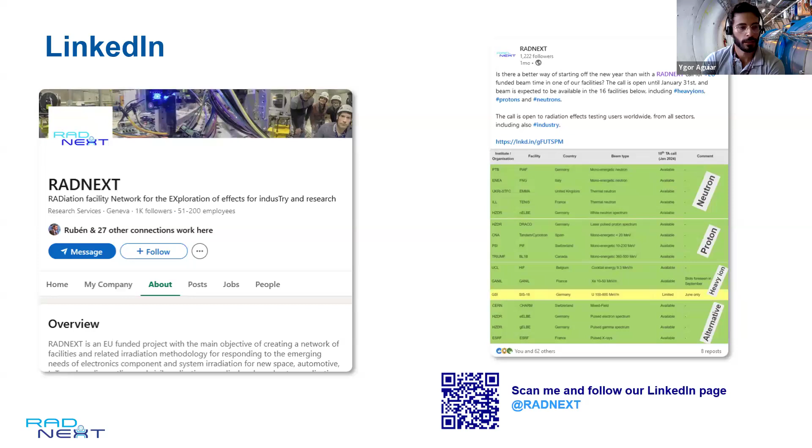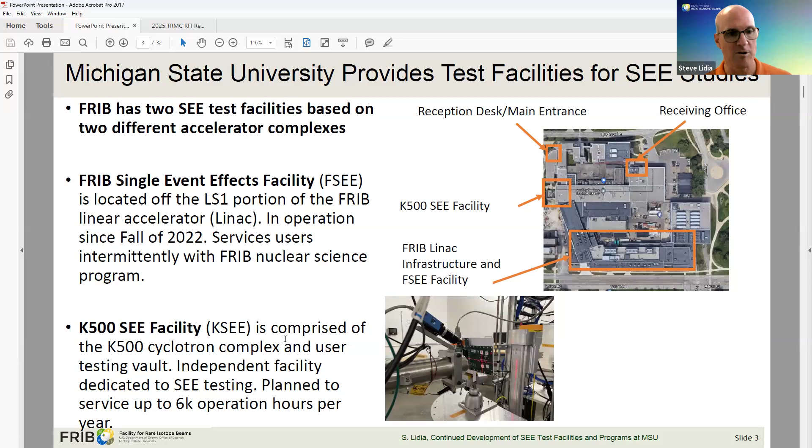The cyclotron portion is over here, and this is using our pre-existing K500 cyclotron, which had been one of the drivers for our nuclear physics program for a few decades. When the linac came online, this one no longer had a role to play, and so we repurposed it. We've developed now a standalone and dedicated facility based on this K500 cyclotron, and we call that KSEE for the K500. So there are two facilities.

Historically, I'm going to run through a little bit of history now with the cyclotron-based facility. It had begun as a standalone nuclear physics driver in the 1980s. There was a second accelerator, or sorry, cyclotron, the K1200, which was also being used around the year 2000 or so.

Those were coupled, so the K500 became an injector to the K1200. And then that drove our nuclear physics program from basically 2001 until 2021, when we cut the umbilical to the experimental beamline—shown here on the lower right—and connected it to the linear accelerator. But that saw beam powers up to about 10 kilowatts, and it also gave us some initial work on single event effects testing with heavy ions.

In one of these experimental vaults, we had basically a cart with instrumentation that we could put in place to run some experiments. NASA worked with us early on, and we conducted just a handful of sessions with them. But it wasn't the most convenient facility to use, and it wasn't the most cost effective either, so we saw limited use with these platforms. But with the advent of the linear accelerator, and now with the dedicated K500 facility, we can optimize towards running with single event effects experimenters.

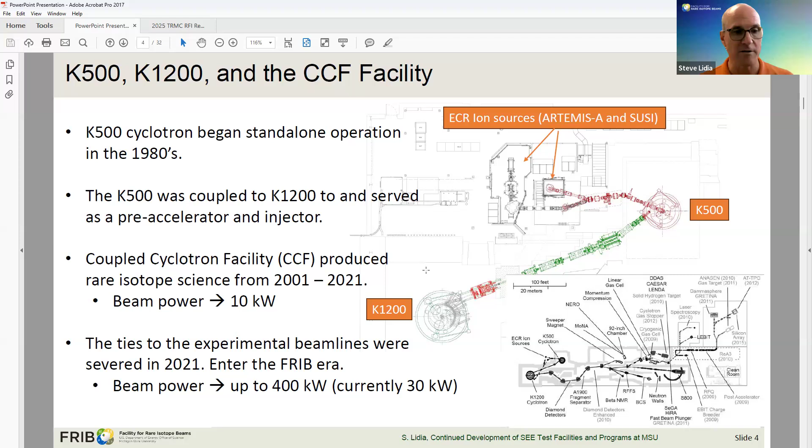In terms of that transition, we had to do a few things. We had to recommission the cyclotron, which involved moving from a second harmonic operation back to a first harmonic operation. We had a legacy control system that we've kept and started to modernize and incorporate into our more modern EPICS-based system. We had to create a new personnel protection system, plus all new extraction beam lines, delivery beam lines, and user vaults. That continued through early 2025, just a little over a year ago.

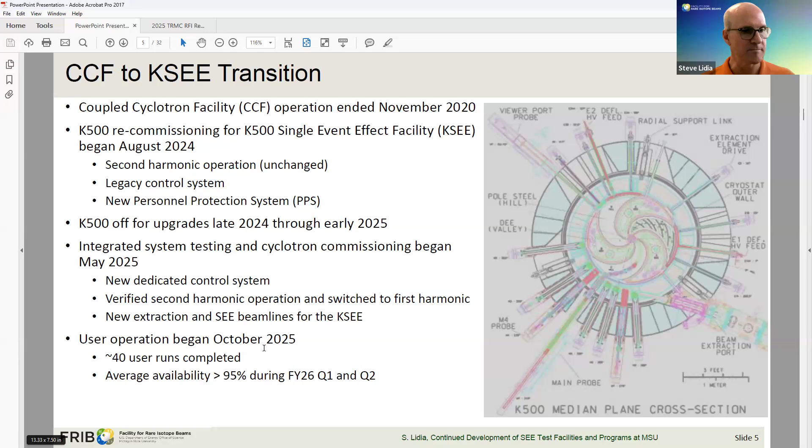Integrated system testing was going on last year at this time, where we brought the cyclotron and extraction systems up, and then into user operations as a platform in October of this last year. We've completed more than 40 user runs at this point, and our availability is fairly high.

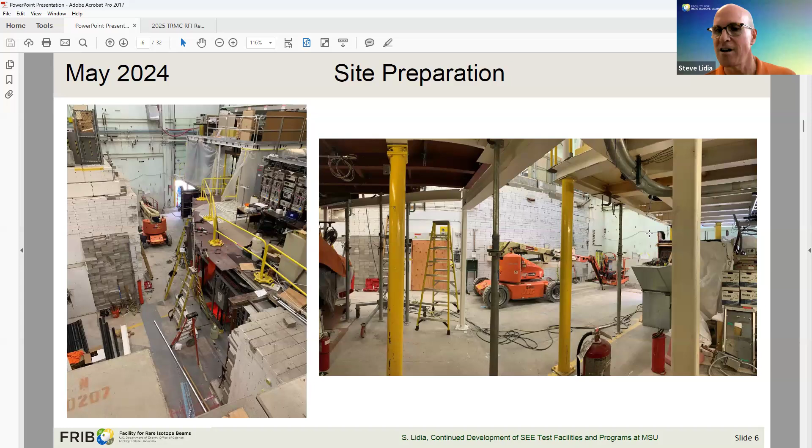This is showing, two years ago, the beginning of our site preparation. Underneath the mezzanine you can see here. By December of 2024, we had the beam lines basically installed.

We have a straight ahead beamline and Faraday cup that we can use for diagnostics and tuning operations. A new wall plug and beam stop was installed, so now this allows us to stop the beam in the cyclotron vault while access in the user testing vault is enabled.

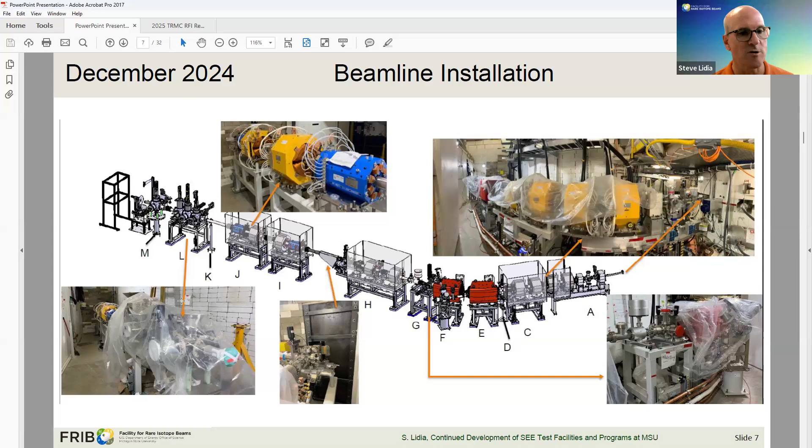We're seeing the beamline established into the downstream section. In August of last year, we were starting the commissioning, so this is showing the downstream beamline section. The octopole and quadrupole transformer is here at the farthest upstream area, and then we get into the dosimetry section, and then the user test section.

That user platform is shown over here on the right, showing the 2-inch window, so we can produce beam spot sizes up to about 40 by 40 square millimeters, a mounting plate, rotational platter, etc., to allow for target mounting and targetry.

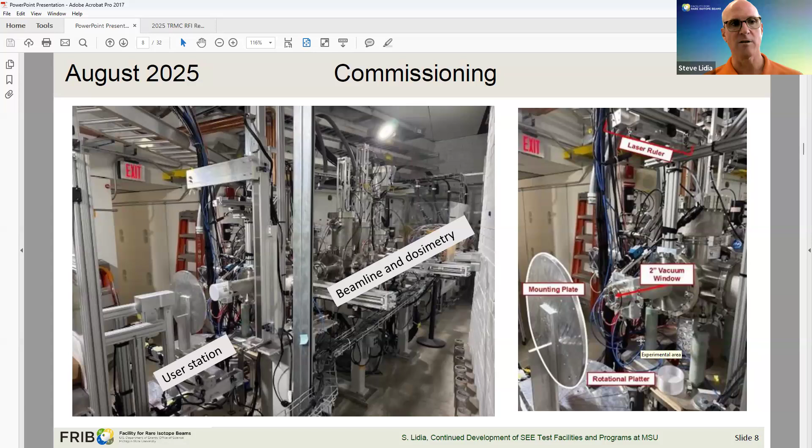So we've now been operating since September. Our first users appeared in October, and the new facility is now up and running. I'll talk a little bit about the capabilities now.

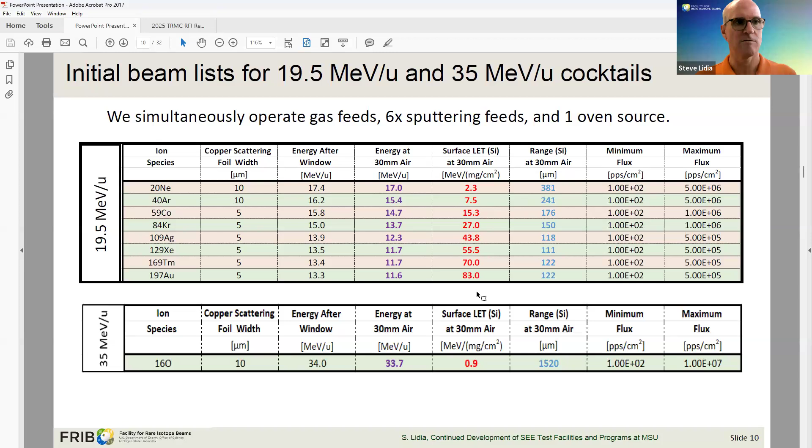One of the improvements we needed to do to facilitate fast tuning of the ion species for test purposes was making some updates to the ECR ion source. This is an existing source, a room temperature source. We actually operate two of these, Artemis A and Artemis B. Artemis stands for Advanced Room Temperature ECR.

Artemis is an ECR ion source, but it's a 14.5 gigahertz source, compared to our high performance source, which is at 28 gigahertz and is a superconducting source. It's based on a very similar source at LBL—in fact, most of our ion sources are developed in close collaboration with Berkeley Lab. This one has been in operation since 2001 as an injector into the K500.

We have a second one, Artemis B, which is our room temperature source, and another source we use to feed the linac, the superconducting linac. So we have some experience now with two of these sources in constant operation. The nice thing about this room temperature source, at this relatively low frequency of 14 gigahertz versus 28 or 30 that high performance sources are getting to these days, is the volume and the access to the external part of the ECR ion plasma chamber.

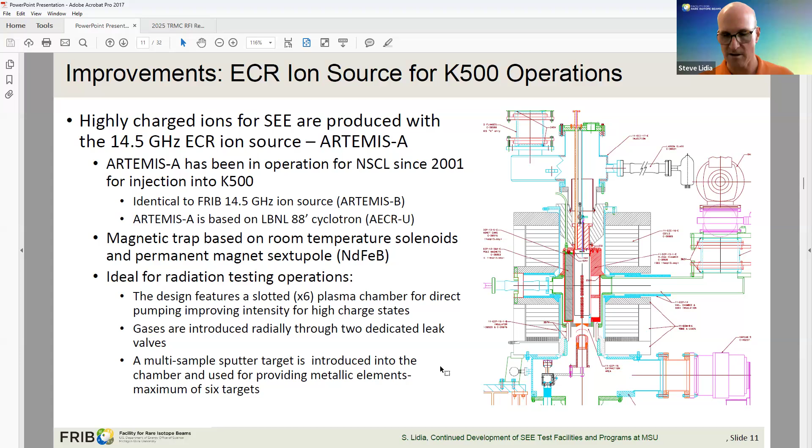We operate them by putting a bias voltage onto those, so we can bias these independently. When we bias it, we subtly change the plasma surface and allow plasma ions to impact on those foils or coupons. That acts as a sputtering source, introducing those elements into the plasma for extraction. When we turn the bias off, it reshifts the plasma surface and those are no longer contributing—so we can turn on and off those sources as soon as the plasma has been established.

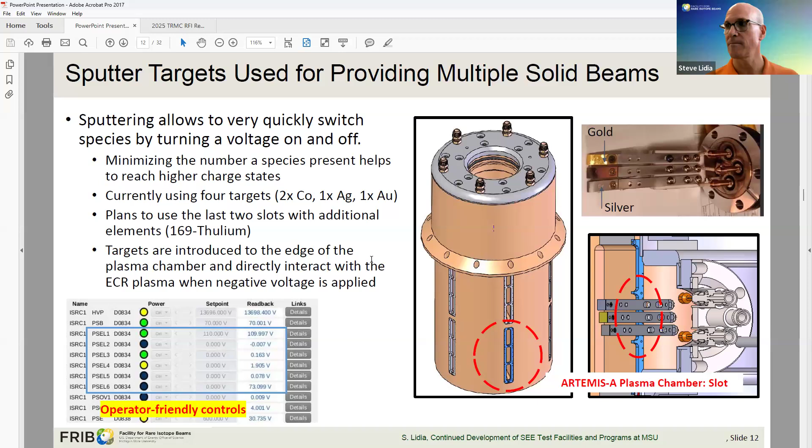Now, in terms of these cocktails, the nice thing about operating an ECR ion source and a cyclotron is we can pack in a lot of contaminants—I'll say contaminants because that's what these elements end up being, contaminants to an overall oxygen plasma. We can introduce them relatively easily and simply, in quantity—a large number of them, as long as they don't have overlapping charge to mass ratios. So we have to be specific about which charge state and mass state we use.

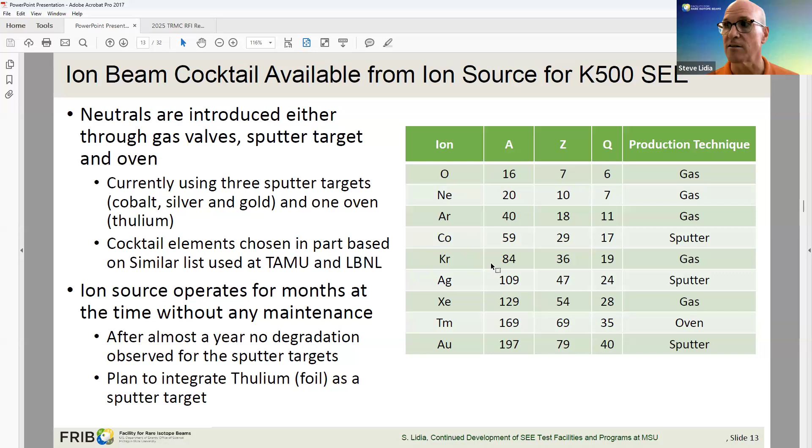But we can operate our sources and generate a large variety of ions covering a large LET range, since the mass varies from oxygen at 16 up to gold close to 200. The cyclotron then acts as an incredible charge-to-mass filter—by making small changes in the magnetic field at a given RF frequency, you slightly adjust the resonance condition to permit one or another of these elements to exit the cyclotron. In tandem, we can make those changes relatively quickly, allowing us to switch from one species to the next within about 10 minutes—a huge gain in efficiency for our users.

But to do that, we do have to set up our cocktails as we call them. So this is an example here of, let's say, our 19.5 MeV cocktail. That's the one that we've developed originally and that we're currently operating with. Our pilot beam basically forms the base of our charge to mass ratio for extraction, about 0.2.

We tune that, so that's our tuning beam. Our pilot beam is our tuning beam. And then as we change the main field by, in this case, plus or minus less than 1%, so this is plus 0.8% and minus 0.95%, it extracts those elements preferentially, and the other ones are still lost inside the cyclotron. We did add neon to our base list in December to add an additional light element.

And we're currently developing now our next cocktail, a 25 MeV per U, slightly higher energy, but it allows some deeper penetration into devices. This one will use a 40 argon 11 plus as our pilot beam, and then allow us to switch between these other elements. We'll need to develop perhaps some different gas feeds, but we're definitely going to be developing different ion charge states coming out. We started that development in March.

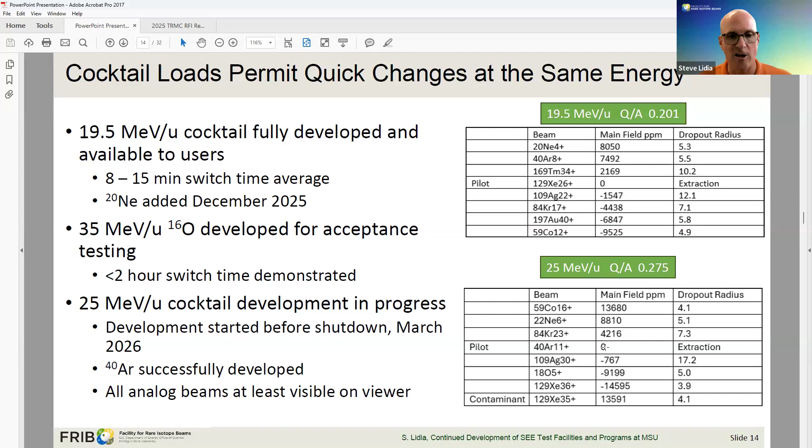We intend to have that completed this summer and be able to offer it sometime in the fall.

Other improvements that we have since made on our ECR source, again on the ion source side of things, is adding a second RF frequency. Now, this one we tested on the Artemis B ion source, which drives the linac, but it's a similar type of development, and would just need to string some additional waveguides to permit it to use on Artemis A. But the intention here is to add up to about 400 watts, somewhere between 11 to 13 or 8 to 12 or so. It's typically about 10 gigahertz that we need for a second RF frequency.

And that does some interesting things with the plasma surface, basically creating a larger area that's in resonance, from which we can extract ions, and creates some higher fields there so that we can drive heavier elements and to higher charge states for extraction. So we did some experiments with that on the linac.

So here's an example of the installation on the linac. This was a solid state power supply, solid state amplifier, that we purchased commercially, and then this was installed earlier this year. We added additional waveguides to the back of the ion source, which was already primed for its use, so we just had to reconnect some other existing waveguides and string things a little bit differently. But this has been installed now and then tested.

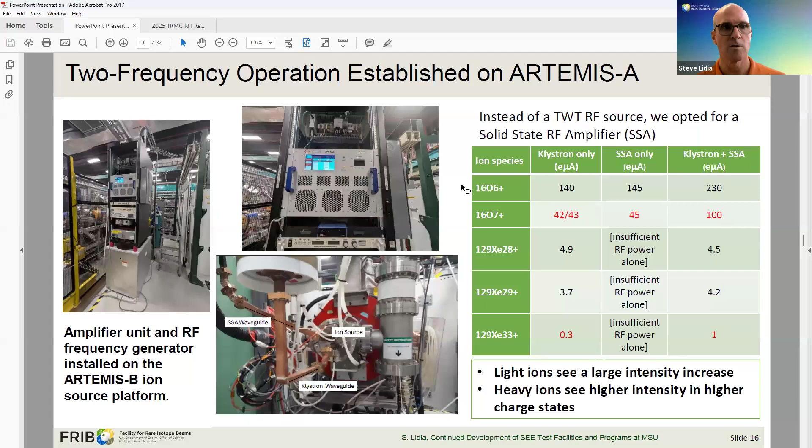I think even since this slide was developed a few weeks ago, we've since filled in June and July. So we still have time in the year, and we can schedule folks much farther out. But we're just working with the existing community and trying to make sure we can fit them in when they need it.

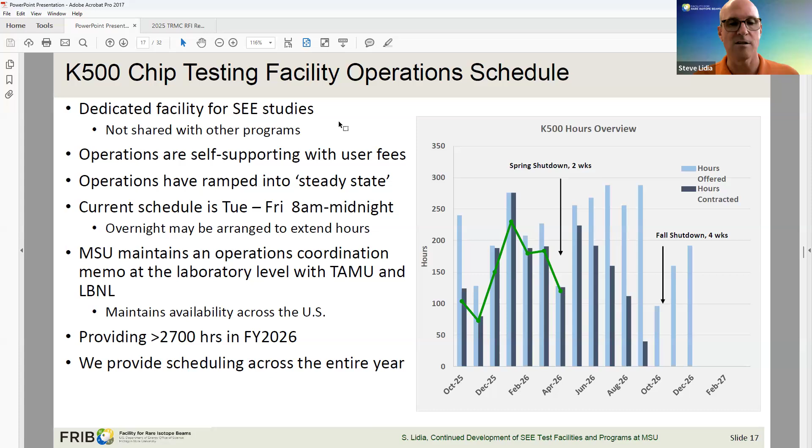We're on track to providing over 2,700 hours in our first year of operation through fiscal year 26, which runs October to October. As I mentioned, we're scheduled through the entire year. The other thing I should mention is that it's a dedicated facility — we're not sharing it with a nuclear physics program or a high energy physics program. This one is set up specifically for SEE users, and other folks that might be able to use the beamline with these ions and energies.

Getting into additional improvements, this is showing a photograph of our user control room, which is sited right next to the user vault, so it's really convenient for users to get back and forth.

You'll notice this touch screen panel in both pictures, and that's the main interface users have to the experiment, shown here on the larger image on the left, where users can manipulate the stage using 4 degrees of freedom: up, down, left, right, in, out, and rotation. We have targeting laser controls, both to calibrate the air gap as well as to identify the beamline center. Positions with the stage motors can be saved into presets and then recalled.

A typical user, who might be loading 8 or 10 or 4 devices to test in one session, can load them up out here in the user vault, use that touch screen to enable the presets and then define them. Then once they're back in the control room and ready for the run and data acquisition, they can just use the touch screen to move to those positions.

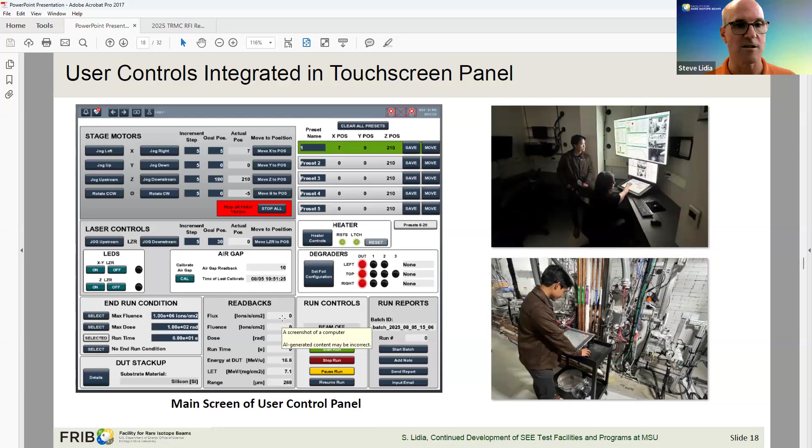Here's the live readback that the users would be seeing on a large screen above that touchscreen panel. There's the live flux and fluence shown here in this middle graph. There is basically just a reference diagram given the ion species and its energy, and whether any degrading systems are in, and what the air gap might be. And if the users have opted to incorporate a stack up, a list of materials and thicknesses in their device, then this dosimetry system can calculate what the LET versus range curve might look like as well. The species information is shown here, as well as the degrader information.

Now, I didn't mention it, but the users have access to basically pneumatically controlled degraders. These are foils which are inserted in the vacuum part of the beam line upstream of the exit window. And that covers a very wide range of attenuation of energy. And it's incorporated within our control system into the dosimetry.

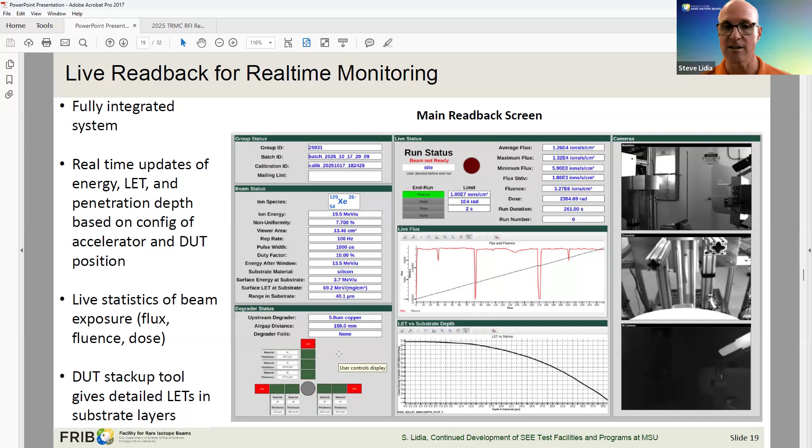This is on the right a picture from that user touchscreen panel, where a second window would come up, giving a list of the available degrading foils that are used. The ones in dark blue are the range of energy degraders which still permit the beam to have some finite energy at the surface of the device. If they're grayed out like this, that means the beam has lost all energy before it hits the device. So all a user needs to do is hit the apply button, and it inserts one or more foils from three different drives into the beam line, acting as an energy attenuator.

The energies and the LET at the surface, and the range computed at the surface in silicon, are shown here. That gives the users some information on what they might be using.

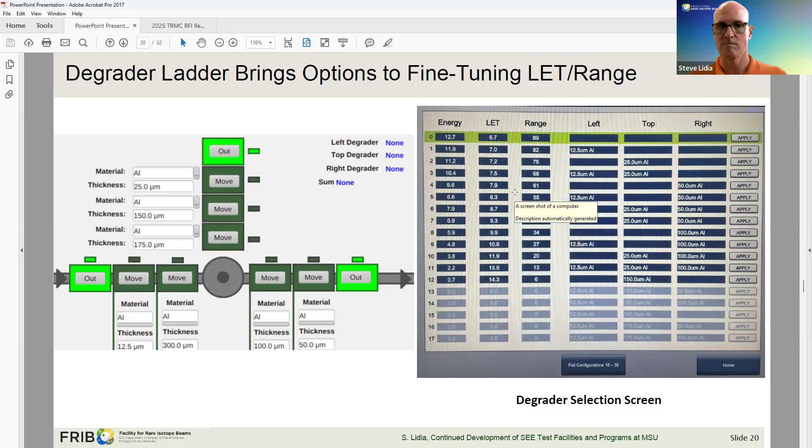The dosimetry we use: again, the triple degrader ladders are at the most upstream part of this three-cross system. We have a four-jaw collimator, which does the final beam shaping before delivery. But those collimation blades are isolated and instrumented, and we use that in a calibrated sense as a means of doing the live monitoring of the flux, which was shown on the last screen.

We calibrate those four jaws against a scintillator and PMT for rate, as well as a view screen for the beam size that allows us to calibrate the flux. A silicon pin stack is also used to verify the beam energy and the beam species, and to verify that there are no contaminants being delivered to the user, through the window and the DUT here.

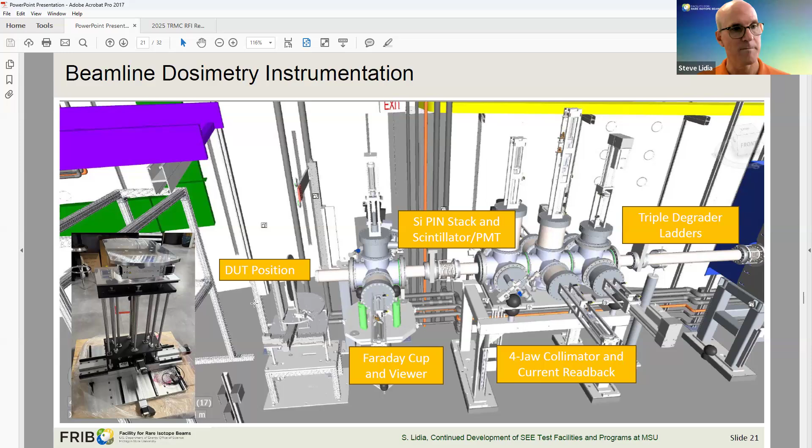So in terms of what that looks like, again it's the scintillator - it's just a plastic, I think it's a BC 404 or 408. Basic plastic scintillator, Hamamatsu PMT. That's basically our counting device, and it's sensitive over a relatively wide range of fluxes that we can produce.

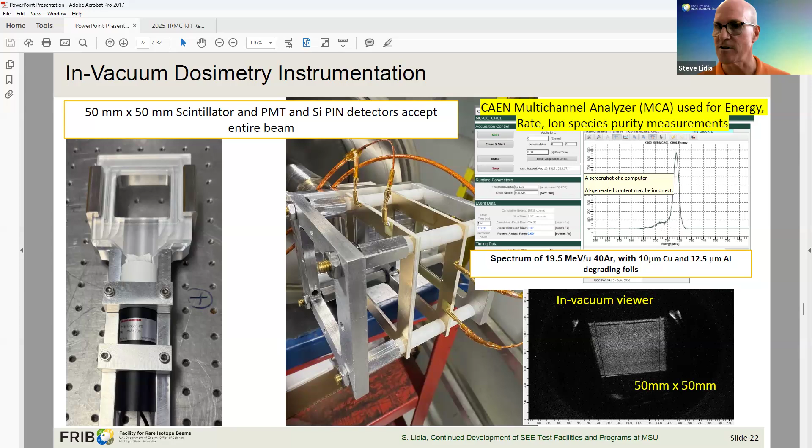The stack of our silicon pin detectors is shown here. And then we use a multi-channel analyzer for energy rate and ion species purity measurements. It's a nice system - it has, I believe, 8 channels. And that is incorporated into our EPICS control system, so it's an online measurement available to our SEE operators or the cyclotron operators.

For the users, we've now added an application. This is a web-based application. We're not actually announcing this until the NSREC conference in July, where we have a paper for it, and at that point it should be online and live for users. But this is just a preview. Eventually they'll be able to use it from anywhere, since it's just a web-based application.

We'll have our list of ion species that are available. We have some facility presets for species, energies, and degraders at both the KSEE and the FSEE facilities. So the ions are indicated, and degraders can be applied, either aluminum or tantalum, on the FSEE side of things.

Then the users can create a stack, if they're looking at our full beam line. We operate a copper foil, 10 microns, which acts as an emittance spoiler and allows us to homogenize the transverse profile of the beam, but it also interacts with the beam as an energy degradation element. Our vacuum window is polyethylene naphthalate, PEN material, about 100 microns thick, and then there may be some air drift. So a stack-up can be produced.

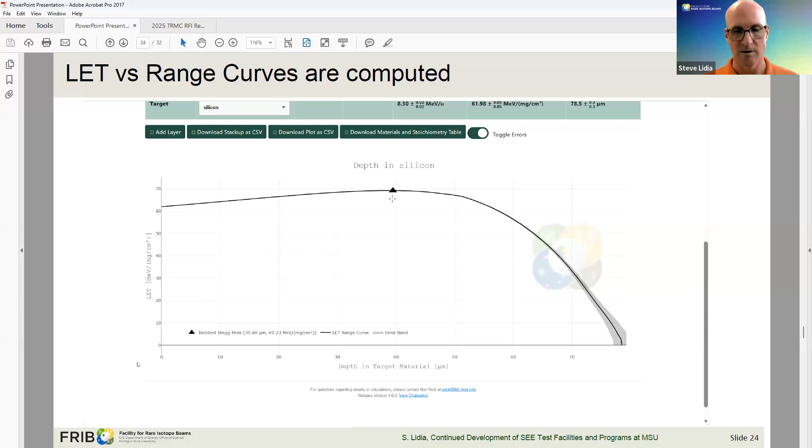We operate up to, again with both of these two facilities, energies of about 40 MeV per nucleon. In the course of developing the linac, typically for the nuclear physics application, we operate a third of it for now for SEE operations, so whatever we do with the linac for nuclear physics has some application for us.

One thing we've had to develop, very useful for SEE applications, is a machine learning based algorithm for quickly rephasing the full complement of linear accelerator cavities. This is how we change the energy of the beam. The full FRIB linac has about 308 SRF cavities, superconducting radio frequency cavities, and using these tools we can rephase them in about 180 seconds, about 3 minutes. That used to take us about 3 days when we first did this, with manual scans. But we've got it down now to a good model and a set of measurements for calibration, confirmation, and validation, so we can change that relatively quickly.

That's important on the linac-based facility, where if we're changing energy we basically need to change the tune depending on the charge and mass of all of those ions - which operates in a different type of production than our cyclotron-based system does. We have other models that also affect our trajectory, taking transverse information from our beam position monitors to allow us to steer and keep the beam centered. This is one area we've been working on for the last few years.

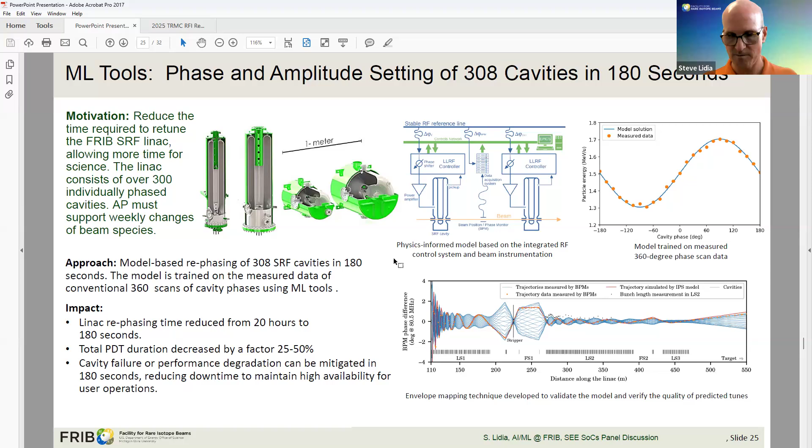There's another set of tools - this is a very busy slide - we have a very active artificial intelligence and machine learning set of activities within the Accelerator Physics group, which looks at tuning of multi-charge state beams and optimization of tunes through the linac. But what I wanted to mention here is one application we've generated: optimizing the output from these ECR ion sources, these plasma-based ion sources.

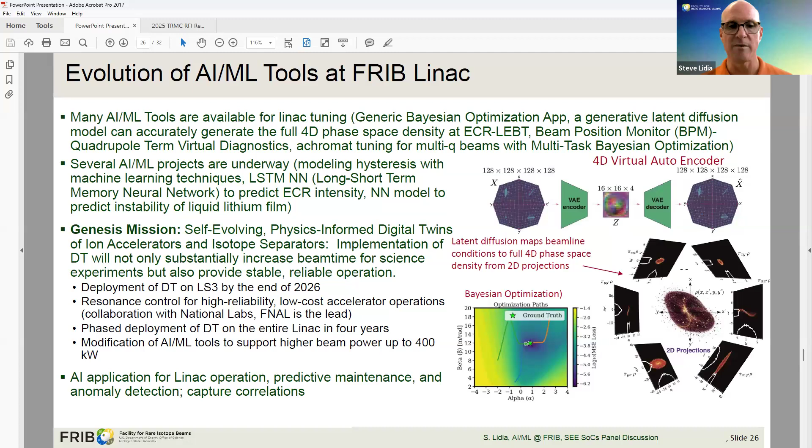Using projections, 2D projections with wire scanning data or other types of diagnostics, we can reconstruct the 4D distribution of the ion beams as they exit the ECR ion source, which allows us to maintain or improve the beam quality for our eventual users. This is something we can incorporate both on the linac side as well as the cyclotron side for all of these types of ion sources, and it's allowing us to improve the emittance and increase the brightness of these sources by several factors.

Additional developments on the user sample holding and processing side: we're exploring computer vision work to do a couple of things. One is to generate a beam profile view, allowing us to use computer vision models in real time to estimate and demonstrate to users what the beam profile will be. When we're about to irradiate their samples, it's good that they know the beam size so they can compare for overlap, or change the spot size by changing the slit size. It provides a projected view onto their device so they can make sure everything is lined up accordingly.

We've also developed a searching and labeling profile which looks at specific devices and can assess and index them accordingly. This allows us to think about automatic targeting, targetry, and exposure systems, where we can analyze a board like this. A user could indicate they want to expose this device, this device, this device, and we adjust the positioning stage accordingly, providing automated scanning and exposure routines.

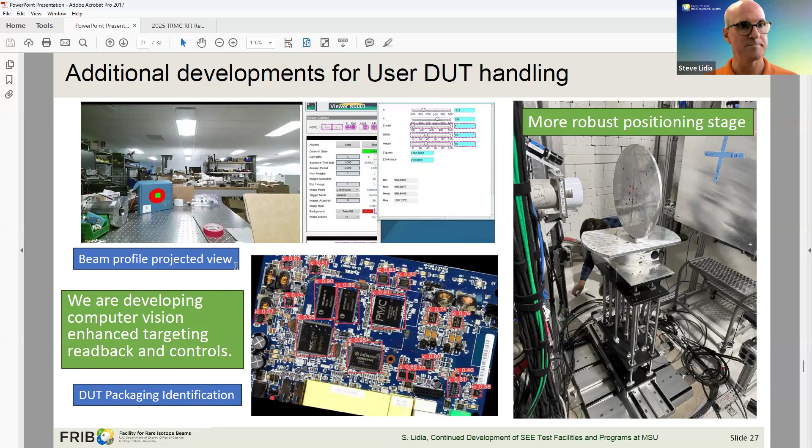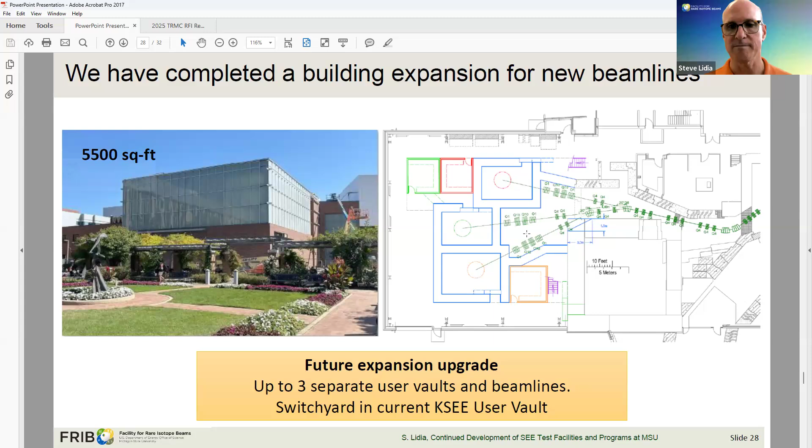Now moving on to development of beamlines and facilities. One thing we've done recently is complete a 5,500 square foot expansion. If you look at the top level sketch, the beam switchyard is the current user beamline area and user experimental area. With the new building, we'll be able to increase the number of beamlines to 3, most likely 2 for SEE and 1 general purpose beamline. This will be an expansion opportunity we'll pursue in the future.

We've responded to interest in higher energy ions, which is now of interest around the world. At CERN, you have the HEARTS program with the CHARM beamline. In North America, currently we only have the NASA Space Radiation Laboratory at Brookhaven, so we're limited in the number of facilities that can produce very high energy ion beams—by very high energy I mean over 100 MeV per nucleon on up.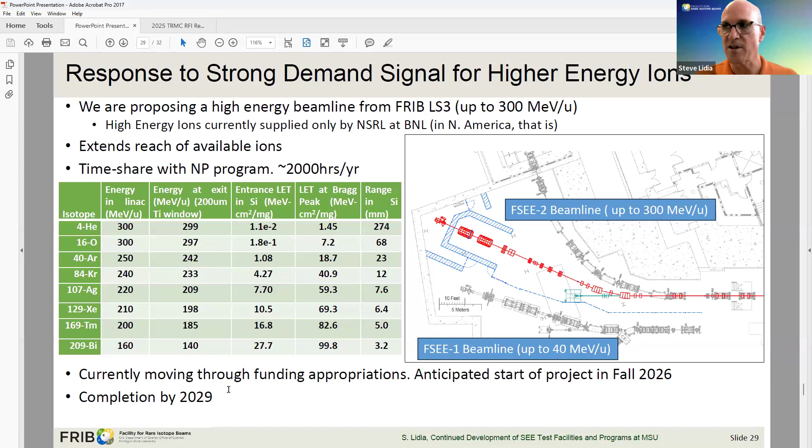We're going through the appropriation process now. We expect funding to turn on at the end of summer, and the project to start in the fall. Given that this is also part of the linac supplying the nuclear physics program, we have to coordinate with those activities, so we're expecting completion sometime in 2029.

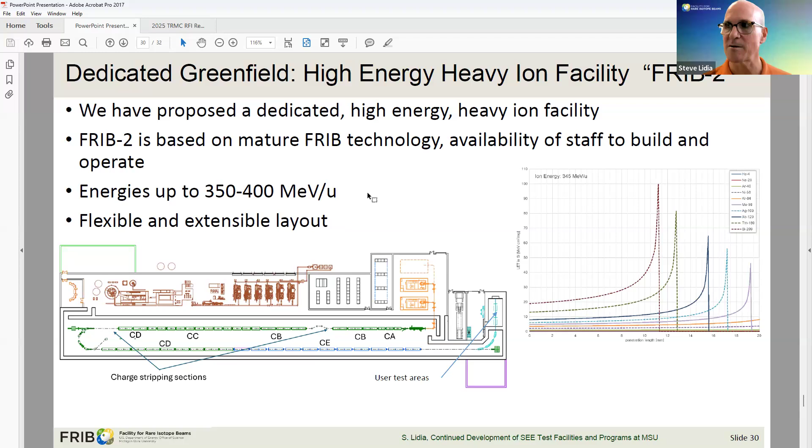Looking forward from there, we have a proposal out for a dedicated high energy facility. This is essentially a cut and paste of the FRIB facility, but for much lower intensities than 400 kilowatts. It allows us to get beam energies up to about 400 MeV per U with these heavy ions.

So I know I'm really racing through the time, apologize for that. But I just want to thank you all for your attention, and I'll stick around for any questions.